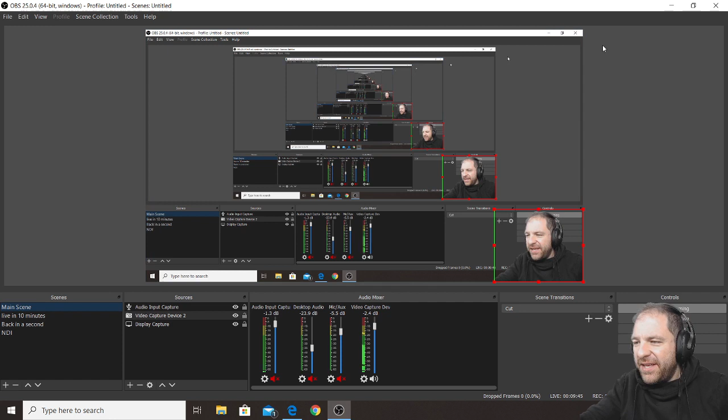Let me open the chat. Okay, and I have to go here. Let me open the right chat because I was watching the previous one. Here, live, fantastic. Ooh, it takes forever to find the videos. Oh, finally the chat, and I can close this.

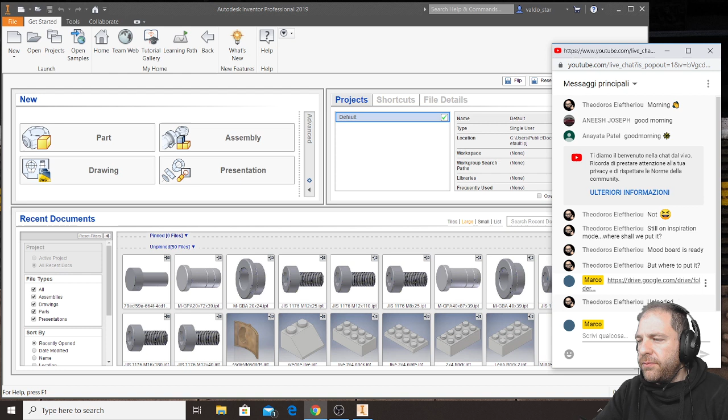So let's see what—great. So then I will have a look at this file, and then I will see if I can show you something that is more specific for the type of project that you would like to do. So I'll just wait for all of your classmates' mood boards as well, so that maybe next week we'll do something like how to do this, how to do that, by taking inspiration from your mood boards.

Today we have to see instead a lot of very complex things, and we need to start really going in depth in modeling complex shapes, because till now we know a lot of tools already, but we can do even more. We can make even more complex things, but not just for the pleasure of making complex things, but because something that happens very often in Inventor is that we may have an idea, but then we don't know how to translate our idea into an Inventor file, and so this sometimes becomes a limit, and a lot of students, a lot of professionals in general, tend to simplify their projects because they maybe don't know certain aspects of the software they are using.

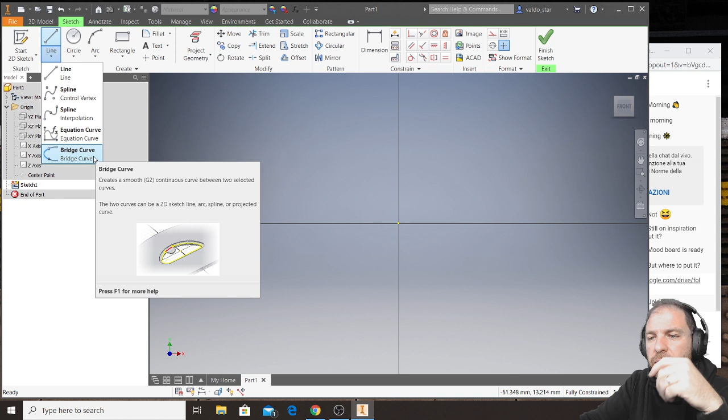First of all, whenever you have a tool and below it there is a triangular button, you need to know there are hidden tools inside that starting object. So below line you can find spline in two ways, and also bridge - an interesting tool that smooths two curves you've previously created. There's also one I'll never explain: equation curve. If you have a function like x plus y plus n equal to etc., you can create a curve from a given function.

So first of all, you need to know that we can just draw lines like this. But what's interesting is that there's a function really hidden somewhere - when we sketch, for example underneath rectangle, there are a lot of additional tools.

There are even 4 general ways to create a rectangle. The one we normally use is rectangle between 2 points - we click on a vertex and then click on the opposite vertex. But there's also rectangle between 3 points, meaning we make our first click, second click, and it can be wherever. So we're not even limited to making straight rectangles.

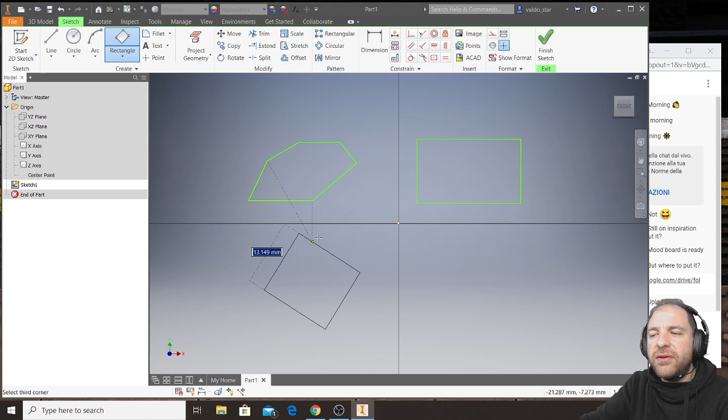If we make this line, for example, then the third point we click will start from that edge, and we'll make directly a rectangle that has a certain kind of rotation. This rotation at the very beginning looks like something you have to manage only after creating your rectangle, while it's not true.

Whenever we draw something - a line, a rectangle, or anything where we're free to choose the direction - we need to see this. Look, when I draw and move my mouse into my viewport, I can see these two numeric fields appearing, showing me x and y, because I'm in the xy plane - the xy position of my mouse.

Sorry, I forgot to open my software for the pen, but why do I want to show you this?

Simply because the axes we see when we draw are the main axes of our drawing plane. This is the x, this is the y, and according to the orientation of our viewport, this point here is the origin, the 0 point. This side is the positive side of our x-axis, this is the positive side of our y-axis, and these are the negative sides of our axes.

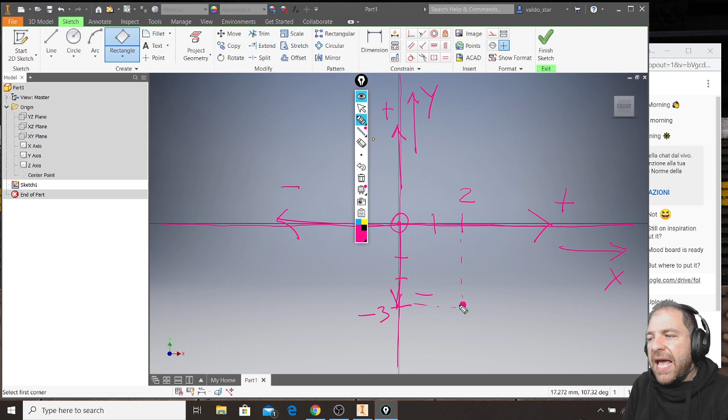So when we draw and see a certain number like +2, -3, it means that with our mouse - the first value is x, so +2, and -3 means we're here for the y. So we are in this position with our mouse. Those numbers can be read from the screen, but we can also type values directly inside those fields.

We just need to know how exactly this happens. So let me show you. That is very simple. That is this.

When I make a line, let's say I want to be sure, even if I can snap the origin, sometimes if I just move a little bit my mouse, I can see that by just making a very small movement, sometimes I'm not super precise.

But what I can do is, when I draw something and I see these white numeric fields appearing, I can immediately press a number. Okay, no, oops. So I can't immediately press the number, but I have to press Tab on the keyboard.

When I press Tab, one numeric field, instead of remaining white, becomes blue. And if the numeric field is blue, it means that I can edit it. So if I press Tab and the X becomes blue, now I can write, and I basically lock the fact that my line will start from a coordinate that has x equal to 0.

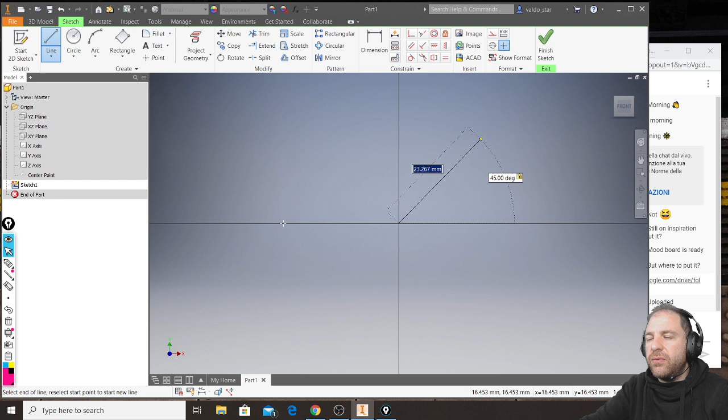Then, if I don't press anything, I can just press Tab again to go into the length. The angle has been locked. You can see that I can't go down here, because down here it won't be 45, it will be 225 degrees, this direction.

And now I have basically two choices. Or I even type my length. So let's say I will make it 30 millimeters and I press Enter.

Or I just set the angle, for example, this, and this is the trick. I press 45 and it is horizontal. And this is weird because you may think that this will be 180 degrees, but you need to see from where it starts counting. So this is 45 degrees from my previous segment, not in general from the XY coordinate.

So I can even just click the length and then I will make it vertical, and so on. But this is to show you that you can be extremely precise even from the beginning of your drawing. So I can type 10, then Tab, and say 135, Tab, and I will make this line here, and then I press Enter. And I can make very precise shapes from the beginning.

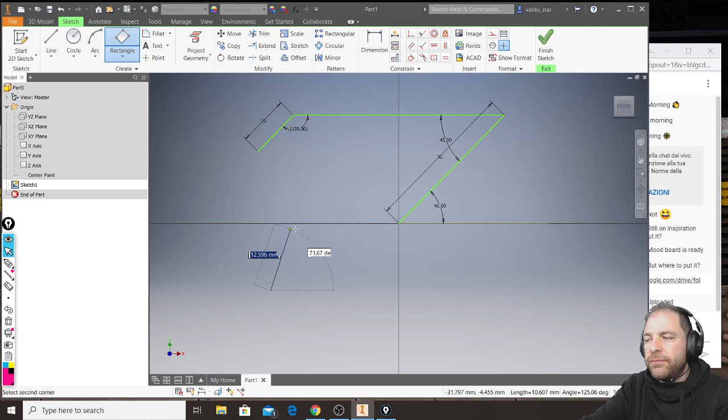And this is true whenever you have tools that allow you to manage numbers. So even when I make this kind of rectangle, you can see that the first point is in X and Y. So I will make it like here. But then, in order to set length and angle of my rectangle, Inventor asks me length and direction.

So for example, I will make length 20, Tab, I will make 45 for direction, Tab, and this is how my first side of the rectangle is going to be. Then I press Enter and I make my second element. Let's say I make it 20 again, so that I have made a perfect square that is also immediately 45 degrees angled.

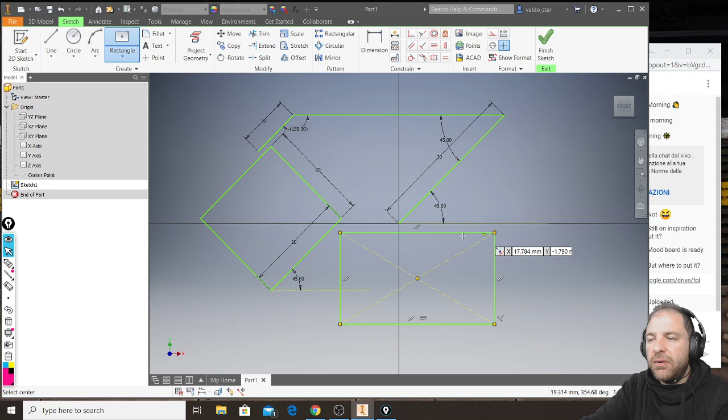But there are more tools in here. So there is rectangle from center, and point. There are also all of these beautiful tools called slot. They are extremely useful when you want to make joineries between pieces in your assembly.

This is because these shapes called slot can be made in a slightly different way. The final shape would be exactly the same. It's only that you need to choose if you want to draw them by taking 3 points, or by making a center point. There are different ways to design a slot.

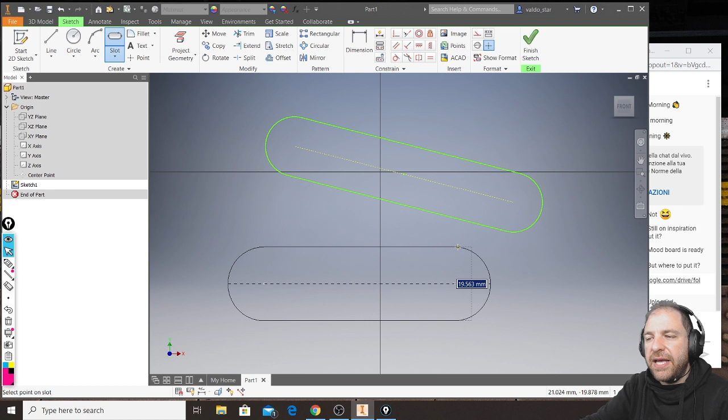Let me show them. The first one is very simple: you pick one point, you pick another point, and with your third click you basically choose the thickness of this shape. You can use another way called overall, where you pick from where this slot begins till where it ends, so instead of taking the center of those circles, you take the extreme points of this particular shape. Again, with your third click, you specify how thick the slot is going to be.

You can also have slot from the center. So you start and your first point would be the middle point, so it would be symmetrical from that point.

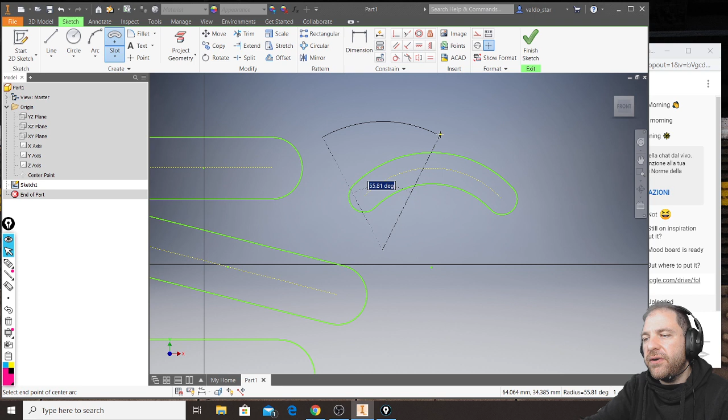And it can be curvy. So instead of making it linear, you can make it curvy by drawing an arc between 3 points, and then use your last click to give the thickness. Or you can make the same thing by starting from where the slot starts, but instead of using 3 points, you set the center of your arc, and then with the second and third click you create the path, and last you select the thickness.

Let's say you have this box. Just make it taller. Okay. And you should make it into an assembly, but I'm just showing you the feature. I make another box, and I want to make a box in this plane here.

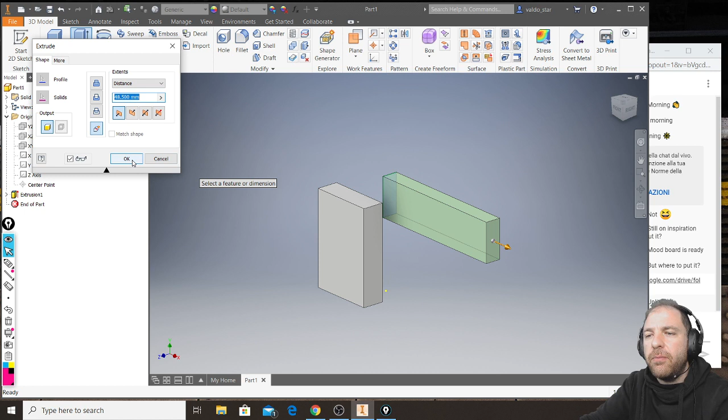But most important, I want to treat these two elements like two unrelated things, so I will use new solid so that they are not joined together, there is nothing in common. But just to show you this, in woodworking when you want to join this with this, and you want to make a 90 degree angle, beside the fact that there are a lot of ways to do it, one sure way is to create slots.

There is a tool called a router, which is basically like a drilling machine, but instead of having the drill bit go in along the axis of its shape, the drill bit cuts from its borders, from its edges. For example, you can easily make this: you can make a 2D sketch on this face, and you can make a slot in here.

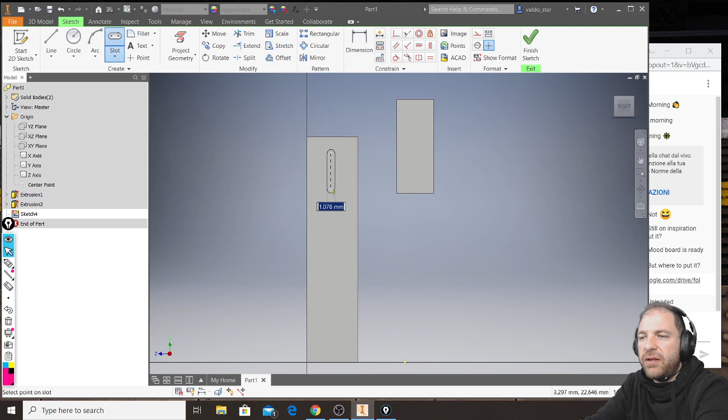I will just type dimensions to remember them, so I will type 5, enter, and I will make it 2, enter. I will make this as a negative extrusion, so I will click extrude, go in the opposite direction, and let's say 48 is too much, let's say 5. So I create this element here.

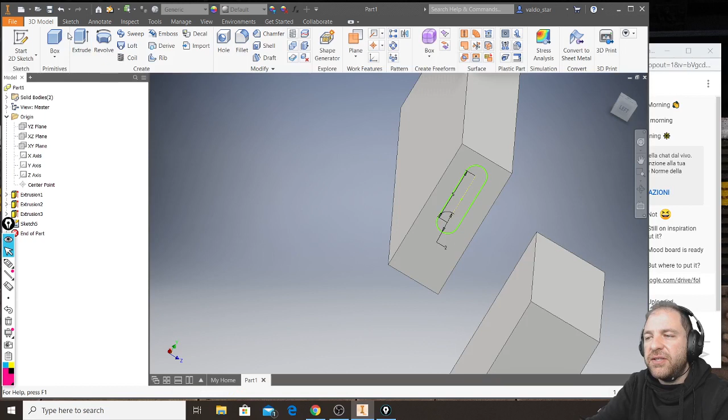In this other piece instead, I will create a sketch in here, and I will make the same exact slot dimensions, so it was 5 and it was 2, but in this case I will finish the sketch and make a common positive extrusion, boom. Now don't mind the fact that this is just one component, but if they were 2 separate components, they could be used in an assembly, because this male connection here will perfectly fit this female connection in here.

And I have 90 degree connected wooden parts. So this is why slot is very common, and also in the real world it is highly used.

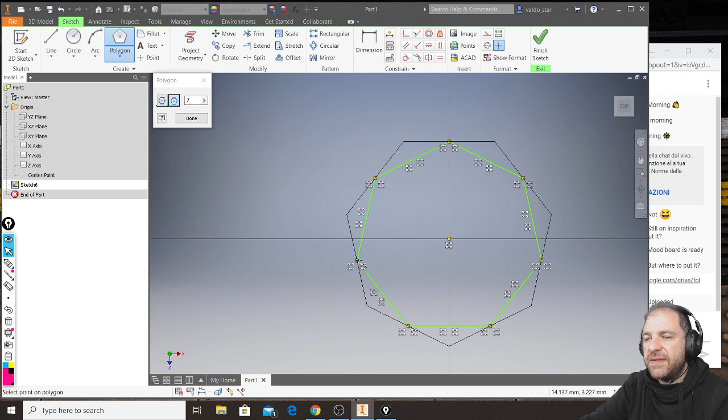And I can make it, as I said, inscribed or circumscribed. That would be like this. And I can easily make regular polygons without trying to draw them one line at a time, while I can easily use this tool that is called polygon.

Okay? Till here? Tell me something. Till this tool? Yes? No? Maybe? It looks like it is maybe.

Great! So look why I've done also this particular shape. When I make a shape like this, or a circle, I can just draw a point in general into my sketch, and the point is an object that has no dimensions, it's just a point that I can snap. I want to show you this because now I can make an arc, from here to here, and I can set my third point on this snap.

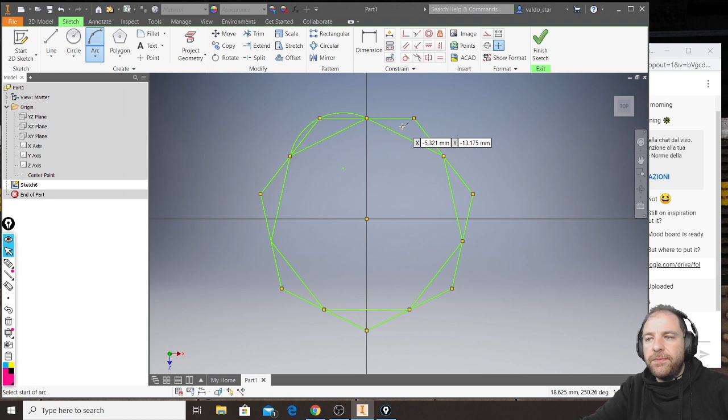And what I would like to do is repeat these arcs in all these other triangular parts. There are 1, 2, 3, 4, 5, 6, and with these they are 7, just because I was starting from a 7-sided polygon. But I have a life beyond Inventor, so I don't want to make another arc, another arc, another arc, and so on.

There is something called pattern here into my sketch. Take care, these are into the sketch tools. So I can find the circular pattern. What it means, circular pattern, in many other software is called an array. The circular one means that you can set a point, and starting from that point the software will create the number of duplicates that you want with a rotation in between them.

So what I have to do first is click circular pattern. By being sure that I see geometry highlighted, I select the shape that I want to duplicate, and then I click this button here to select the center of my rotation. Once I have selected these two things, the geometry and the center, nothing else remains than setting how many repetitions I want and how many degrees my repetitions need to cover.

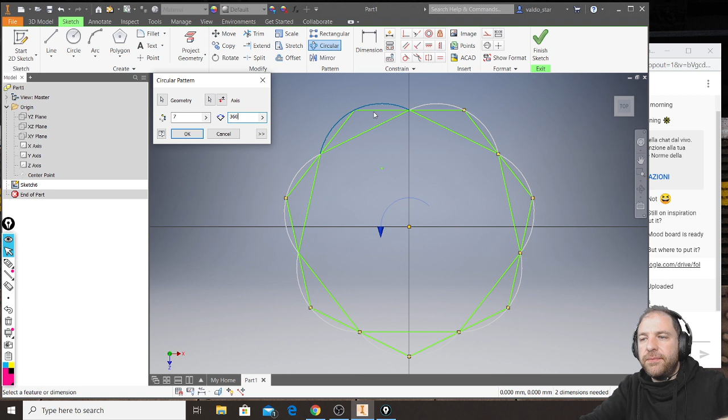I can use this button instead, that is called flip, if I want a clockwise or an anti-clockwise rotation. In my case, I really want 360, 7 objects. I click OK. And I have made this very complex shape in a matter of seconds.

If I want now, I could delete all these elements, but in order to avoid deleting, just to remember, if you don't want to extrude this one, what you can do is just select them and then click this option up here that is called construction. So they become thin, visible elements, and they won't be considered when you make your solid transformation. So I can click OK.

I have this kind of flower looking thing, and if I extrude... oops, no. Yes, like this. Why? I mean, it should be perfect. Sketch, extrude. No, I don't know why it doesn't like it. Because they are perfect. No, it's okay.

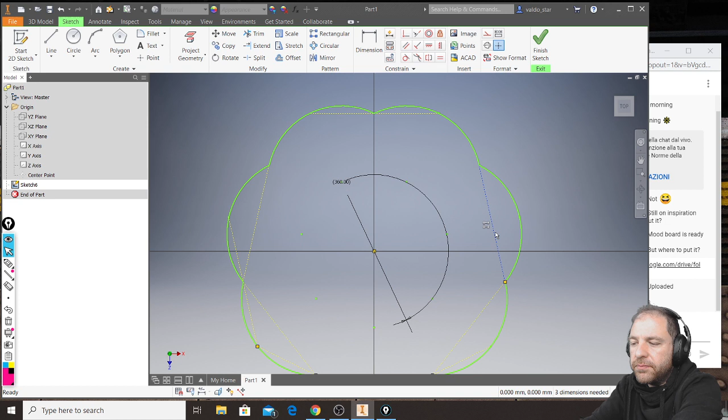So, you know what? Just delete all these construction things. Just delete them, because let me see if this was the issue—if Inventor doesn't like these construction lines.

Okay, let's see. Finish. Extrude. No, it doesn't like them, I don't know why honestly. It should be fine, I don't know if they are not touching for a very small part.

They shouldn't. Let's see if I chamfer them or fillet. Oh, chamfer. Anyway, this is... no.

Or Inventor is just stuck, probably. Probably yes, ah, that's easier. It was crashing, okay, sorry. Sorry, this is not my fault, but Inventor was stuck.

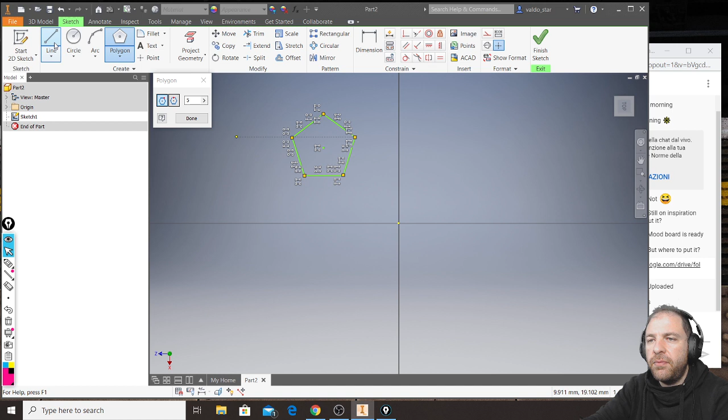So let me continue with pattern. This is a tool that you find into Sketch. Sometimes you already find the center because you are using a circle, but let's say you have these. Let's make a pentagon. And then I draw my pentagon just somewhere, and I want to make other pentagons all around this one.

So sometimes I don't already have a circular shape or a shape with a center, so when I have no additional geometries in Inventor, I can create a point to make my circular pattern. I will make a point by moving my mouse over here and going down, so that at least it will be aligned with my midpoint. The point isn't that visible, but it is just this dashed thing in here.

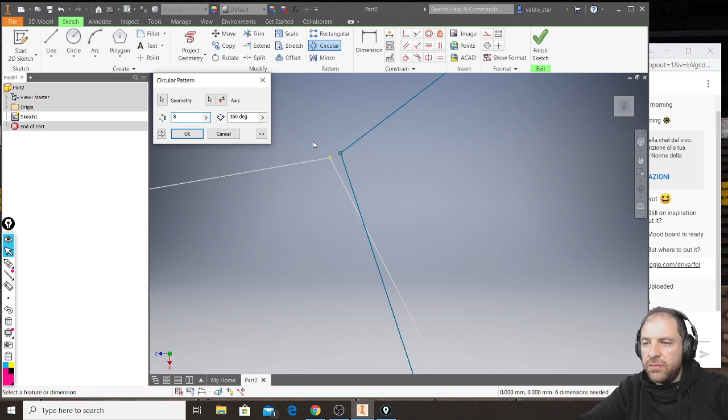So I can still use the circular pattern by simply selecting the geometry first. Then I have to click the center and I can pick my point. And I can create as many duplicates as I want. Let's say I want to try to make 8 of these.

So that they have those intersections. Click OK. I can see that these shapes are intersecting each other. So let's see if I can use trim to cut these parts. And it happens that, as you can see, you can't trim them.

This is weird because this is happening only because this is a circular pattern. So what happens is that it's basically something where if you modify one of these, it will keep modifying all of your objects.

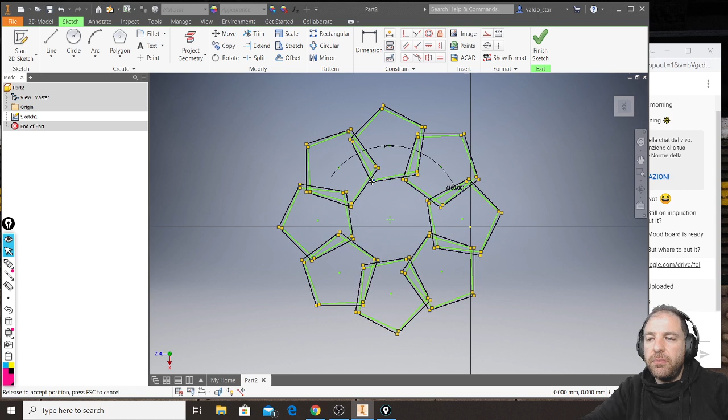And I forgot, so this is why the previous shape wasn't working. But if you want to now start from here and make a sketch by removing this possibility, because you now want to maybe trim all these lines and make a shape that you can extrude, you need to do this.

You finish your sketch, and one interesting but slightly complex thing you can do is make a new sketch on the same plane, and you can simply project all this geometry onto the new sketch, projecting only those that you really need.

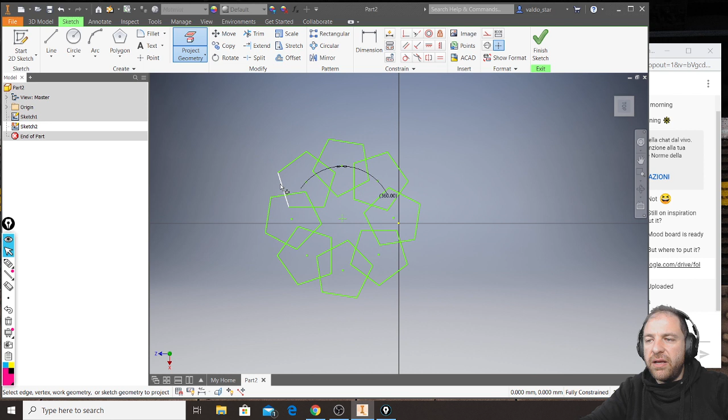Maybe I already did this. Okay, I finished the sketch. And if I hide my first one, by right clicking, deleting it, or just changing the visibility, this is the copy of projected edges that I have created in my second sketch.

I will edit this one and try if I can trim it. Again, you can do it, but if you select your projected edges and remove the constraint—select them, right click on the constraint and click delete—you will see what happens. So here, delete the constraint.

You will see that the thing... delete the constraint here... delete... oh, here, oh how lucky I am. Nothing, I mean just do it, try by yourself, and then yes, finally you will be able to trim them and make a shape that you can extrude.

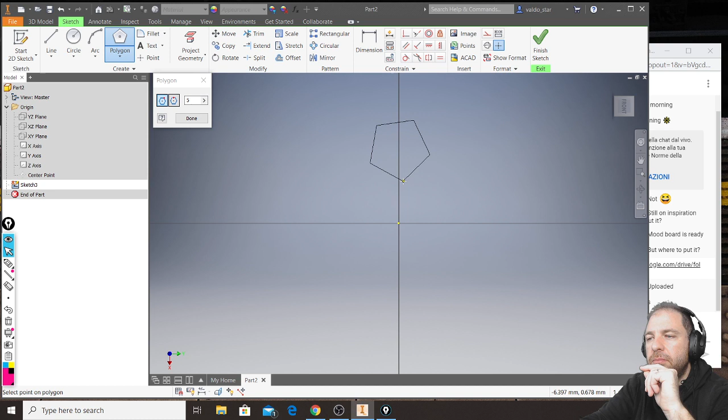Look, I will delete all these shapes and make something that is a lot easier as well as a lot more productive. I select the plane, make a sketch, make my single polygon. Let's say it was like this, and I do one interesting thing: I close the sketch, making this immediately become a three-dimensional tool. So I extrude it, whatever side I want, and I make it like that.

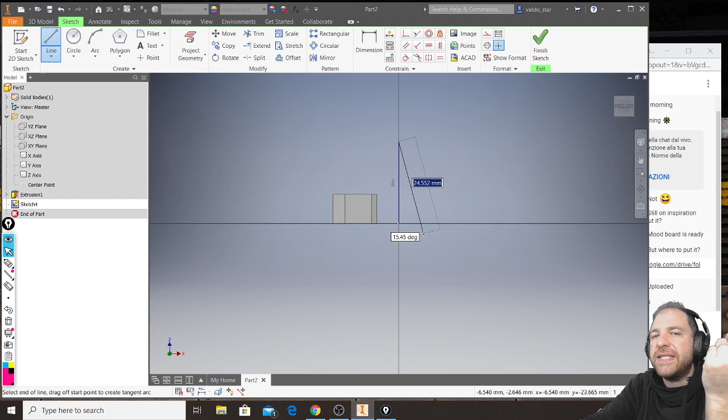Okay, ready for this? Now check this. On a perpendicular plane, not on the same plane where I have drawn my pentagon, I select another plane, and I draw one sketch that will be just one line. I'm making it vertical because I want this to become an axis for my circular pattern. So I make this vertical line here. I click finish.

Before doing anything else, let me show you another tool placed next to plane, called work axis. Work axis allows me to create axes from existing geometries. So I will click here and click on the line, and now I see this new element called work axis.

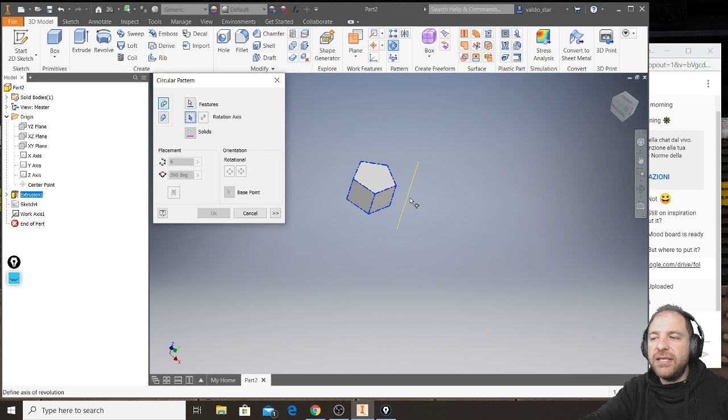Also, because axes like planes are invisible, I can even hide my line. Now check this: by being in the 3D model tab, I can see patterns here too, and specifically I'm showing you the circular pattern. What would be great is, instead of multiplying the sketch into one complete shape, I click circular pattern, click the feature - the entire solid I want to rotate - then click rotation axis and select the axis I created before.

So instead of creating one sketch that already has the shape I want, I make one little piece, and then I say I want 8 of these. I click OK, and boom, I have the shape I wanted to create.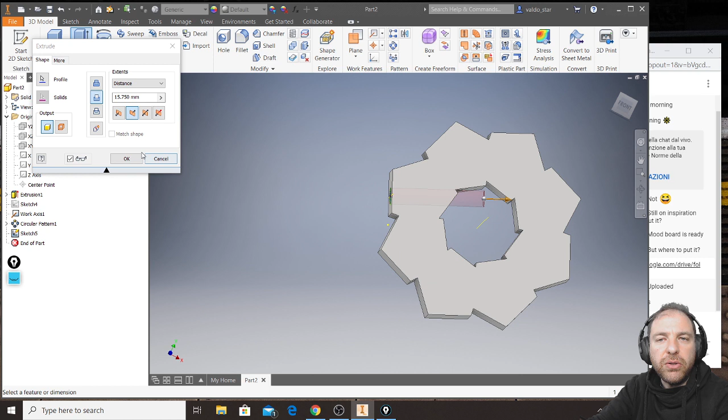What is phenomenal is that my axis remains there. So if I want to modify something, watch this: I select this face of my octagon and extrude it, creating this shape. I extrude it with a certain value, so it goes till here, and this becomes basically a hole in my simple 3D object.

If I change my mind and say, now I have one hole on this side, but it would be great to have the same hole in all other objects - where's the problem? I make another circular pattern, select the feature, which is basically an empty cylinder, select the axis - having that axis always there is perfect because they share the exact same center. My holes were 8, so I click 8, click OK, boom, and I have the same feature repeated all over my objects.

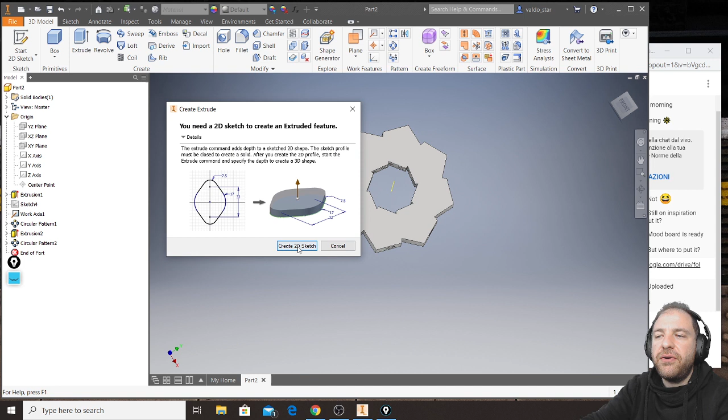And I can keep doing this. Let's say I select this plane, make another extrusion, create a 2D sketch, and create something here - it just has to be a closed shape. Perfect. I extrude this other shape from the opposite side so that it will cut my final result.

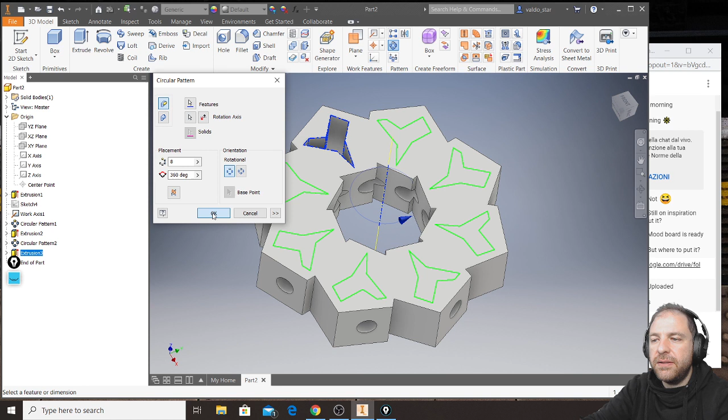Because I'm not that happy, I click circular pattern, select this feature, select this axis, and click 8 objects, click OK, boom, and I have the same cut repeated all along my objects.

Okay, are we good up to here? Let me know. Yes? No? Maybe? Perfect.

So if we get this, what we can do now - this isn't really important, but for example I could select this plane, and you can see that working with precision starts by being extremely important. You can see that my axis actually is also contained in one of my vertical planes. Why do I want to do this? Simply because it's not really important, but it's interesting.

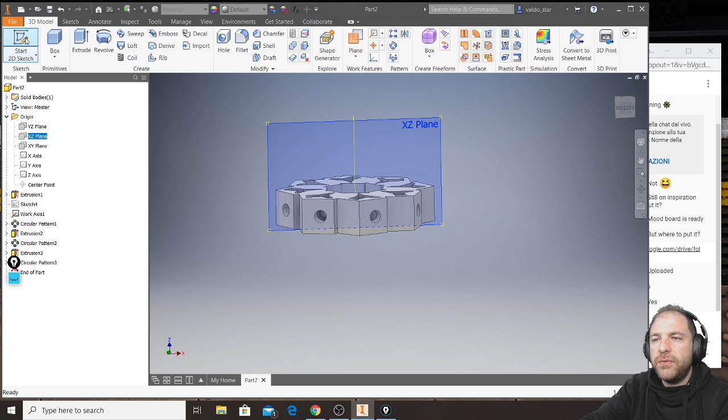I will make a sketch in this plane. For example, I'll go to View and change the visual style to wireframe so I can see in transparency. And in my sketch I will draw something like this. Why not? I click OK.

Then I make a line to close this pattern here, and I finish the sketch. I can go back to my view, visual style, shaded with edge, just to show you that having that axis is something crucial.

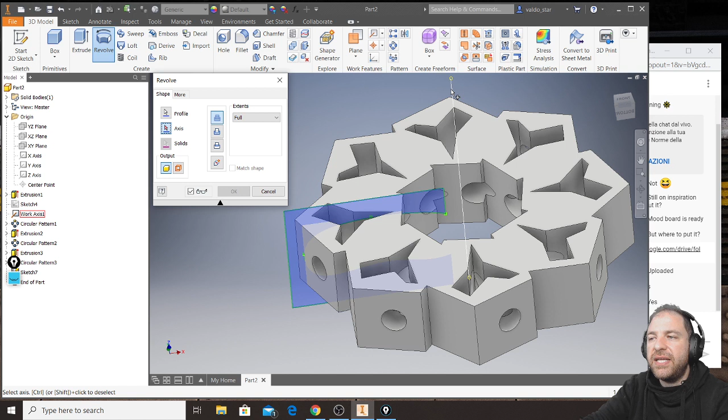Because I can also use revolve, and when I select the axis I can still use this axis here, so that I make a rotation of my shape around the axis. For sure I won't do a join because it will cover that masterpiece I've made.

I will use that particular shape to cut what I have created before. So I click cut, click OK, and after all these steps I was able to create this very complex looking shape that is rounded on top and on the bottom. It has 8 repetitions.

I can keep adding features and features. For example, now I could fillet it, probably. Let's select a loop - let's see if I can fillet it, this loop. Maybe 0.5.

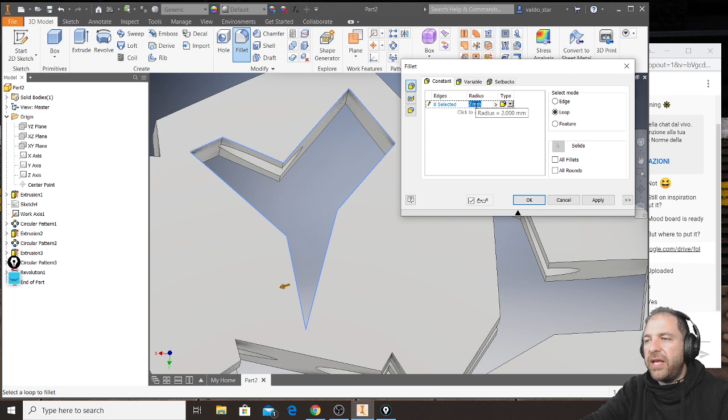Okay, so let's say I want to fillet these. I want to fillet that. I want to fillet this one. So I'm making a lot of fillet combinations. And again, it takes forever if I have to repeat these fillet options for all my available edges.

No, I selected the wrong one. 0.15. No, I have to select just that one, I shouldn't select that.

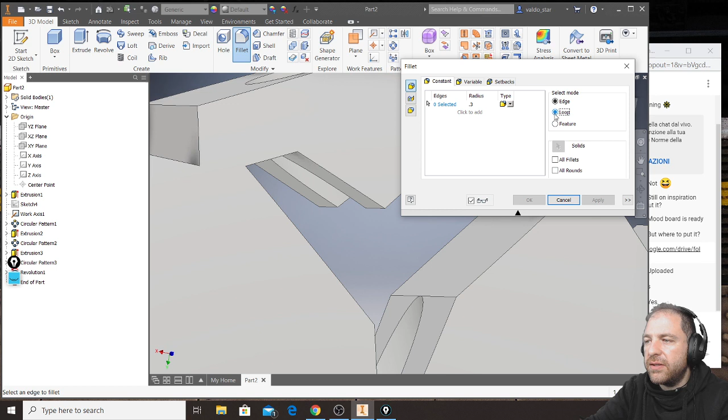Okay, so quickly, I want to show you that in general, pattern is something that duplicates features. But what you need to realize is that features in Inventor are not only shapes. If I'm using fillet, look, I'm using fillet in one part of my shape.

Boom! I say, take care, you can see that now if I keep 6, the result will be wrong. There has to always be a meaning. I click 8, I click OK.

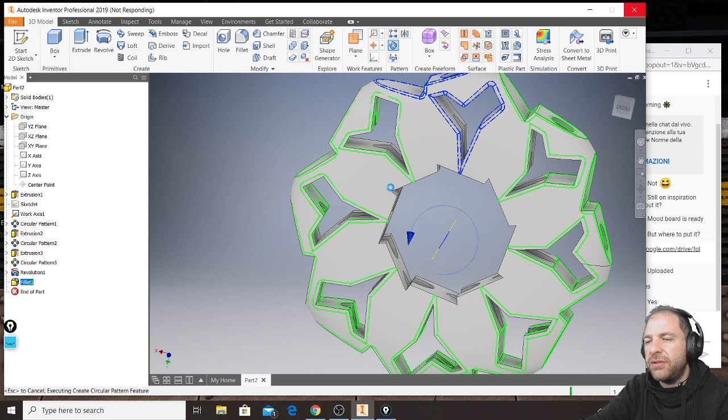If Inventor doesn't crash... I knew it. But I am, oh, phew, but I have also repeated fillet all over those 8 additional parts of my shape. Okay?

And this is why it is important to understand that there are patterns in Inventor, but it is a lot better to use them into the 3D model rather than using those that you find into the sketch.

There is also rectangular pattern. So let me delete. I'm so sad to delete it because it was looking great, but it's okay. So let me delete everything. And what is a rectangular pattern?

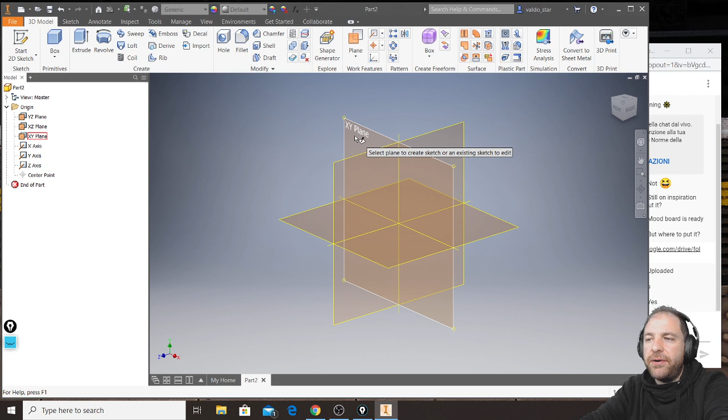It's basically this. Look, let's say I make a box, nothing fancy. And in this box, I want a lot of holes. But not holes that I can just make with hole, because maybe they have a certain shape.

So I create a sketch. Again, I make a polygon, this time a hexagon, but not for any reason, just to try different things. And I make this hexagon shape in here. I click finish, and I will extrude this one. That can be positive, can be negative, it doesn't really matter.

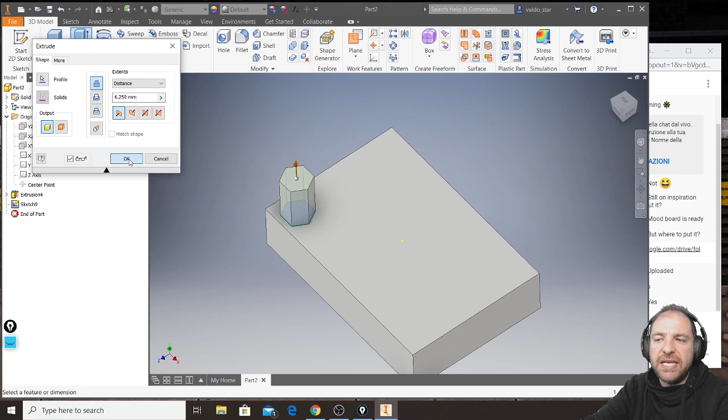But if I want more of these, what I will do is I select rectangular pattern. I click feature so that I can select the feature that I want to multiply. And then I need to pick direction 1 and 2. So I've made this simple box first, simply because in this way I can pick this edge as direction 1. I can pick this edge as direction 2.

And don't worry if it is going in the direction that you were not expecting, because when you pick the direction, first of all, this button is called flip, so you can always flip the orientation according to the direction. So I will do this in this case. But you can also use your direction to be used as a symmetry axis, so you can have your duplicates go in both directions, but in this case it's not useful at all.

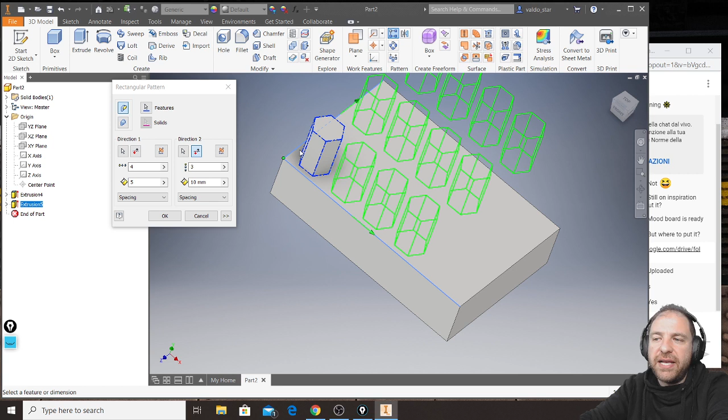So I can, for example, decrease the distance that is in between each of my objects. Let's say I will type 5 in here. But I can also, and you can see this, if I make 5 now, I can see that yes, this starts at a certain point and it finishes here.

But I don't really know how long this thing was. So another way to use the rectangular pattern is instead of spacing, I specify distance, and I have to pick this one. And I specify the distance between the first and the last one. So let's say I will make it, I should read how long it was. I think it was about 24.

No, it was 22. And inside this 22, I can have as many duplicates that I want. So instead of changing the spacing in between, I know the distance between the first and the last, and Inventor will equally space all additional duplicates. Let's say 5.

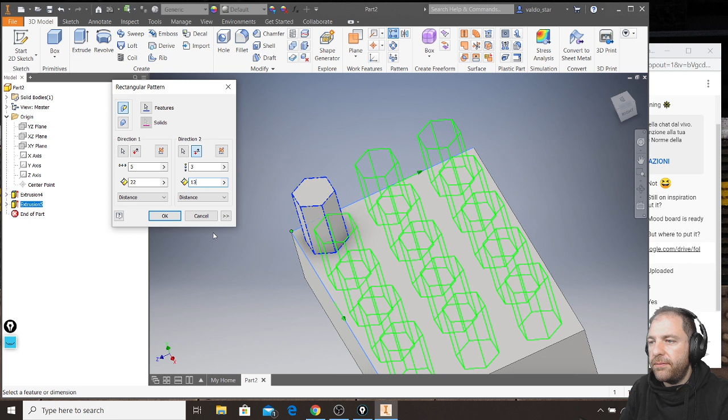Same thing can be done in the opposite direction. So I can have the spacing here, and I can always choose just the space in between each of them, or even here use distance. It was 13, exactly. And then inside these I can have as many duplicates that I need.

I click OK, and I have all my duplicates created. I have this extrusion and this extrusion. What is great is that if I change this extrusion and click OK, my pattern is immediately updated. As well as if I change my mind and say, instead of going up, I want them to go down and cut, I update the extrusion and the final result updates too.

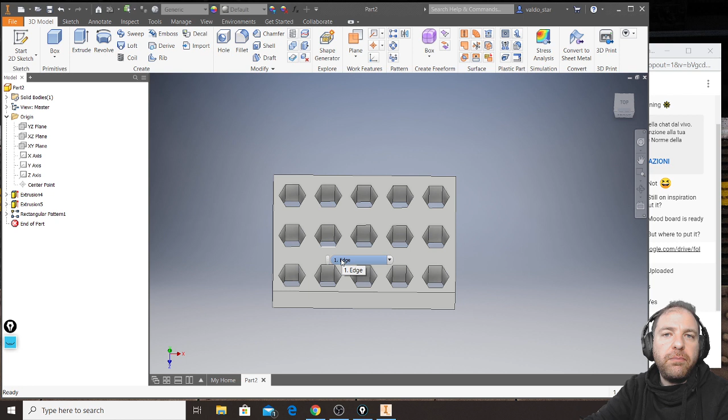What is important is that the direction I have selected was perpendicular, but you are not limited to being perpendicular. So if instead of a box I had a shape with lines that are not 90 degrees angled, it will work the same.

Okay? Till here? About rectangular pattern? Yes? No? Maybe? Because now I have to show you something that is unbelievable. Perfect, I love also the depth of your answers. No, like, is it? Yes. Just yes. Okay, and it's okay.

Let's see something more that I want to show you in the Loft tool, because we have seen Loft and I showed you that Loft is a tool that allows you to combine multiple shapes together. But what is interesting is that you can have much more control in Loft by creating guidelines. What does it mean? See this.

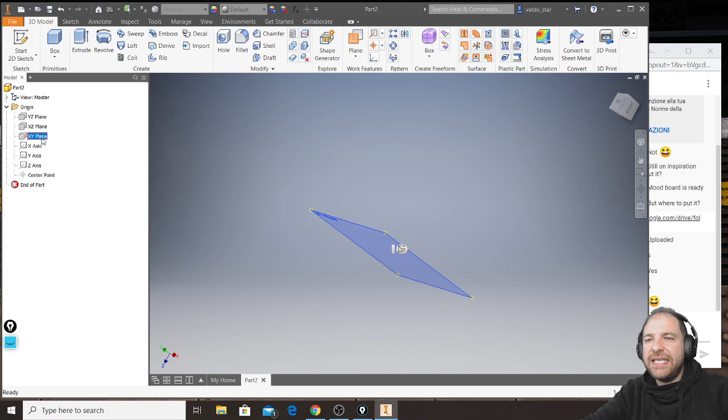Let's see this. First of all, I will make a very simple one by making two planes. So I will make one shape on a horizontal plane, another shape on another horizontal plane, just offset from the starting one, and I will show you two different results. First, let me create this offset here. So I have these two planes. Let's say 10 millimeters as the offset.

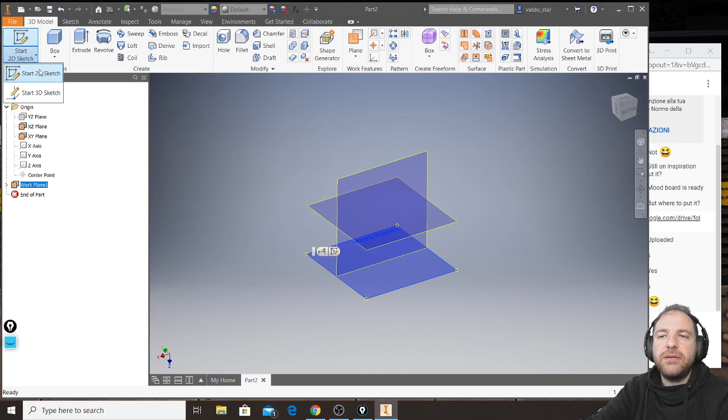So it was this one. I can also make it visible just to show you. I have these two planes, and I want to make this plane visible too, just to let you understand what I'm going to do. Look, in this lower plane, I will start by making a simple sketch.

And to make it even easier, I will keep my line open, so even if I make a surface it doesn't matter, but we will avoid having problems with the sketch not working. I will make this shape here. Then I will select my upper parallel plane and make another sketch, starting also from the axis, like this. And I finish the sketch. So I have nothing really special here.

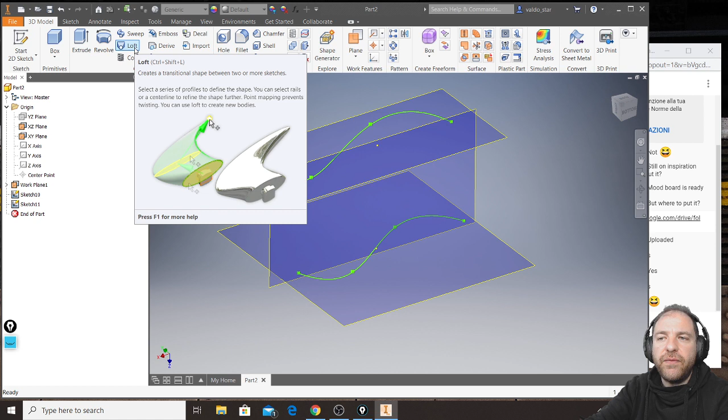I just have two sketches in two planes, and I know I can use Loft by clicking to add. I will make a surface, just because it's faster, and click this and that. But you can clearly see that because my shapes are created in two parallel planes, the connection between them will be basically a straight connection. So if I click OK and hide these planes for a second, what I obtain will just be a perpendicular surface that is wavy, connecting the top and bottom open lines.

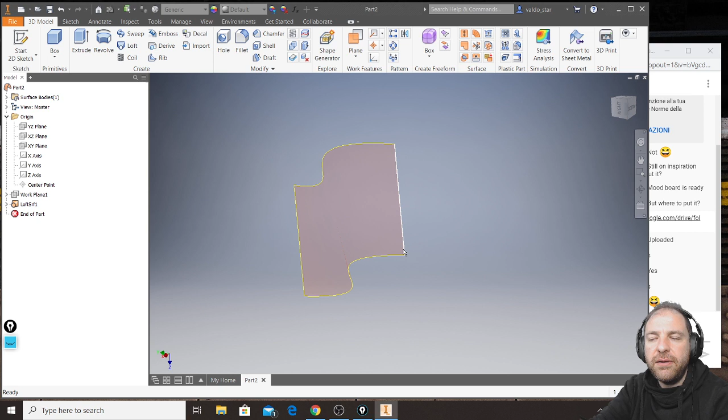Okay, so nothing really exciting. So what can we do more? I delete these - I don't want to delete my sketches, just the feature, because I will reuse those sketches. I just want to use this plane here, that is a perpendicular plane to my shapes.

I will create a sketch here, and it can be whatever, but for example, I will create this spline here.

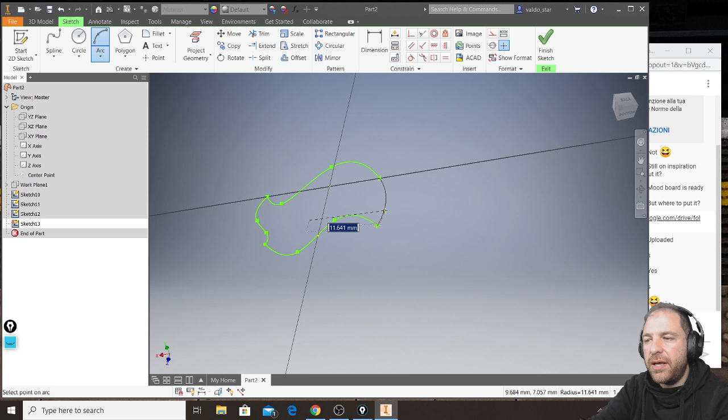I will create another sketch on the same vertical plane, but it has to be different—can be straight or an arc, for example. If I can't snap it directly, I will project this geometry and that geometry so I simply create two points, and then I will snap my arc here, and finish the sketch. I hope that this was precise—I don't know, but let's see.

So what I will do now is use loft again, and I will do something unbelievable: I will click to add, and add this and this again as sketches. You can see the result looks exactly like before—there are just two sections, and they are giving me this straight result.

What I will do instead is add rails. I will click rail here and choose this one—and it's not precise, I knew it. I will use this one as well, but unfortunately, no. It's so annoying when it happens. Let me quickly check if that is fine. I click rail and select this one, and this works—sorry, that wasn't snapping. So I just do it again quickly.

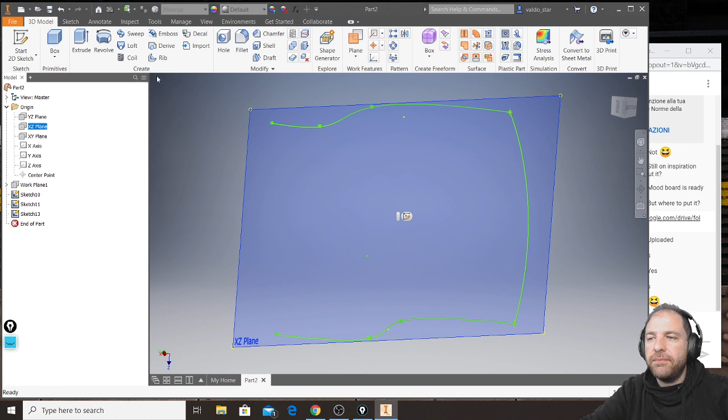I make a sketch, but I project this point and this point so that I can snap my spline. Exactly, okay.

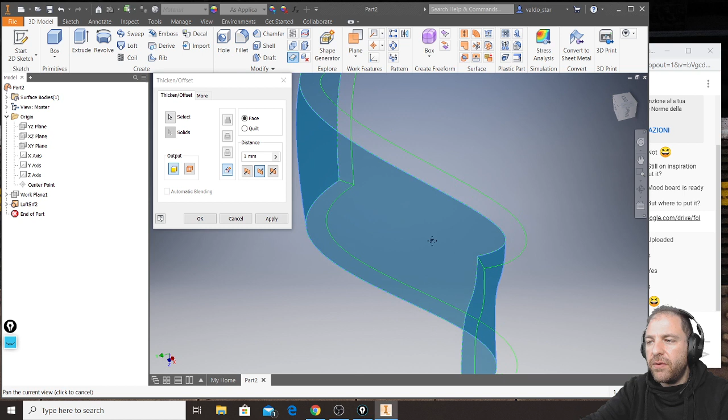So again, I select these two profiles, and I click and add this rail, and on the other side I add this rail too. So basically I have 4 lines creating a more complex and organic shape. I click OK, and I get this great looking surface that I can later turn into a solid by selecting it and using thicken—maybe 1 millimeter, but from the other side. Even if it's a little too thick, I click OK, and I have created this very complex solid using 4 curves for the loft.

Technically, if I am precise, I can have as many profile curves as rail curves that I want. I just need to be a little precise in snapping points, because if not, as you have seen, this feature won't properly work.

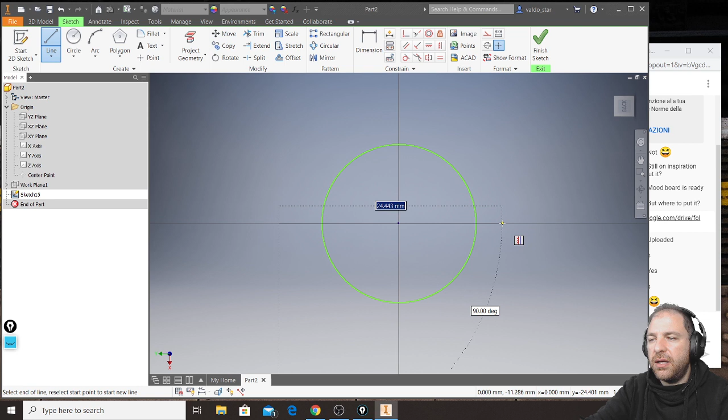So let me show you another, very visible result—see this. I have this plane, and I make a sketch: a simple circle from the center, and then a line so I can trim it. Now I want to have the same exact circle on my parallel plane. So I start a new sketch on this other plane, and I don't want to redraw it, so I click Project Geometry and finish the sketch. Now I have these two beautiful arcs on both of my parallel planes.

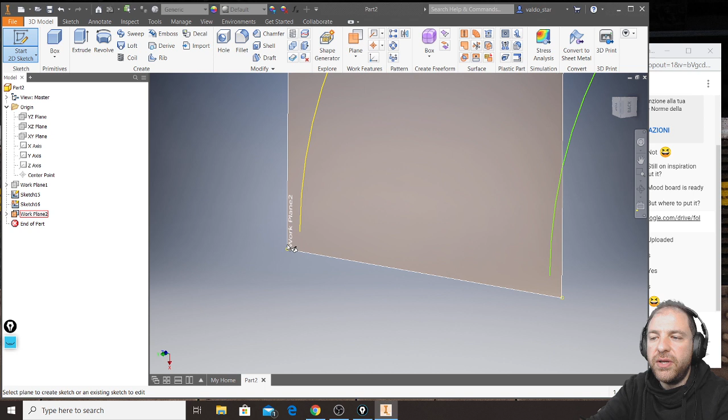If I want to make a rail, I need to be sure I work on a plane that intersects my rails on my shapes. So, for example, I will make a plane parallel to this one, but passing through a point—I'll pick this vertex. This way, this additional plane will for sure touch this point and this point, so I can make another rail on this new working plane. I want to make another arc, but snap it to these two vertices, so I project this point and this point so I can use them, and I make another arc like this. Now I just hide this plane.

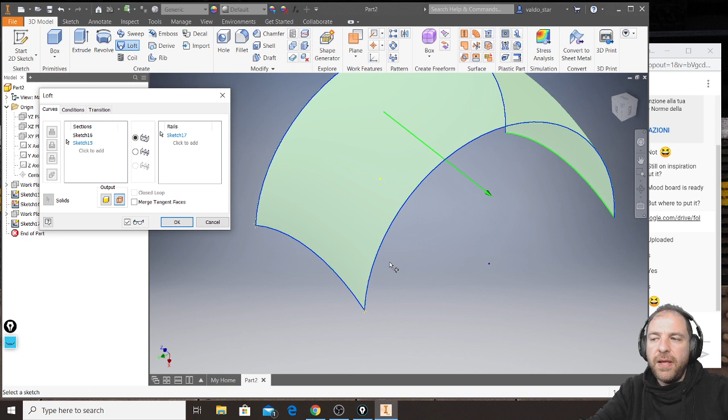So look what you have: two sections, one rail. You use loft, add sections, click this and that. They are one the projection of the other, so their connection will be perfectly straight. But I've created this unbelievable shape, so I can use this as a rail. This way, instead of having just a cylindrical shape, my circles, my arcs, are connecting each other while also having this curvy path.

I will then, just to make them more visible, turn them into a solid using thicken. Click OK, and this is the result I have. I can also hide the surface. Now I have this solid that is curvy all over its surface, plus it is curvy here. Okay? Yes? No? Probably?

Now I want to show you a feature that takes a while to be mastered, but thank you for the feedback - it is unbelievable. It's called 3D sketch. Let me show you this additional feature, because this is something very complex and it really depends on case to case, but it is too cool, so I need to show you.

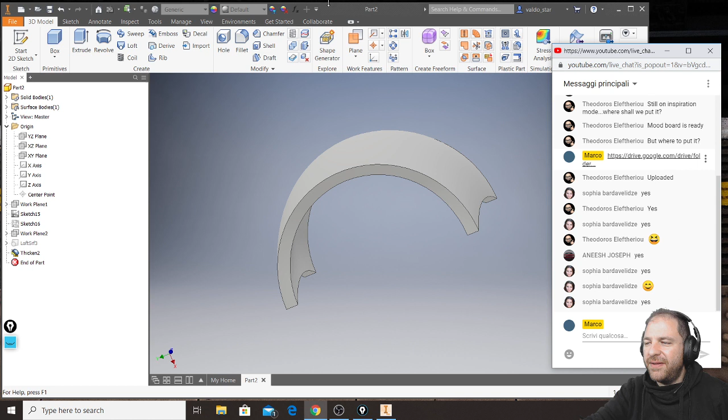Let's see this. Now I have this phenomenal shape, and I want to use - do you remember we have seen sweep, for example, last week? It is the possibility that we have to create a path, to add a section, and the section will follow the path. But what I want to do now is something a lot more complex than just creating a path and making a shape, because I want to make a path that will stay all along this object here.

I need to create a path that is not planar, because my shape is not planar anymore. It is curvy like this. So I can't just select it and make a sketch, because this is not a plane. But what I can do instead is this - look.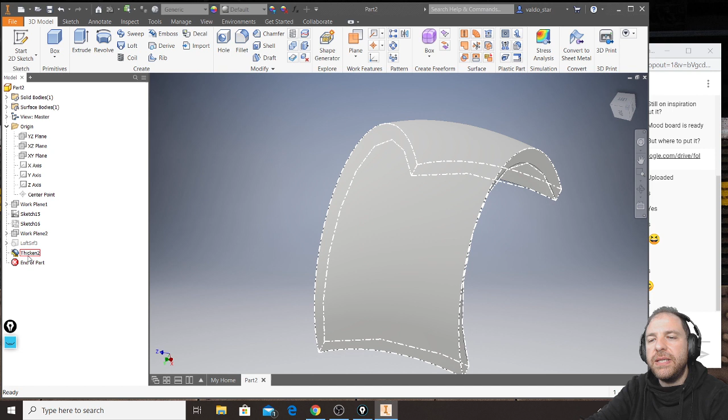I will show this surface again, and instead what I can do here is make another surface. So I will make something like a spline - it's not mandatory to make a spline, I do it just because it looks more complex. But I will extrude this spline, and it has to be a surface. So I extrude this one.

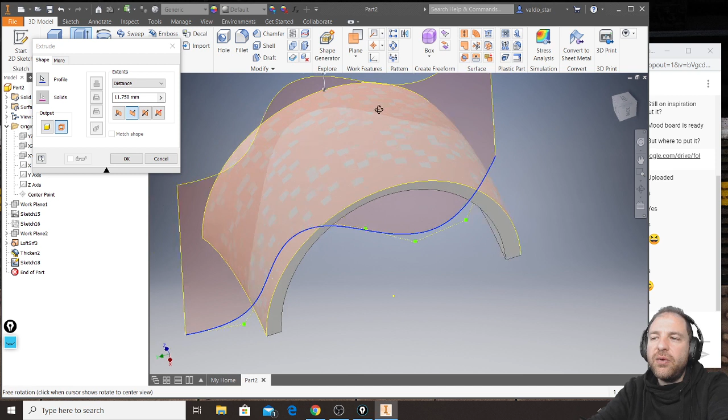And I will see that this surface and the one I've used to create my loft are intersecting each other. So I will click OK. And now I have that surface over my solid - you can see it in orange - plus this second surface.

So check this, because instead of clicking 2D sketch directly, what I will do is click 'Start a 3D sketch,' which has just a few tools, but what's interesting is that I can create a 3D sketch by using these tools here that are extremely powerful. So I will click intersection curve.

So I select geometry 1 and then I select geometry 2, that is my second surface - this one. I click OK. Boom! And Inventor will create this yellow shape that is a sketch.

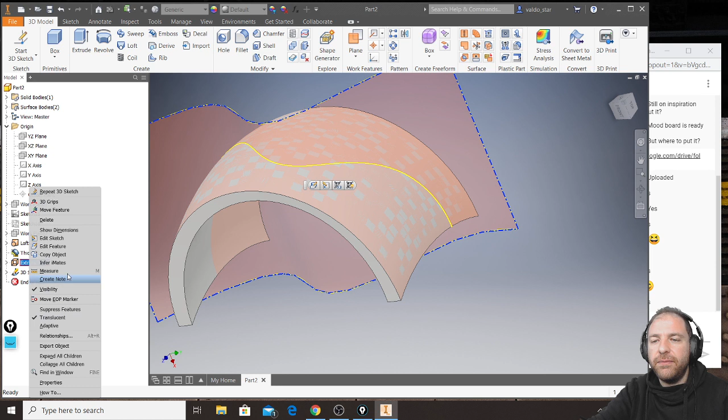So it is something that can be used in multiple ways. One of these is I can use it for sweep. So I finish the sketch, and just to remove unwanted things that I can't delete, I will hide them - I remove the visibility from these two surfaces, just to show you what I have created as a 3D sketch.

So if I want to make a sweep, now I just make a circle - should be fine if I make it here. Let's see, so I make a circle by using a 2D sketch. Let's say I make a circle here. Should be fine, let's see. I don't know why it took this line, so let me delete it. Okay, so I use sweep, and the software finds immediately the profile.

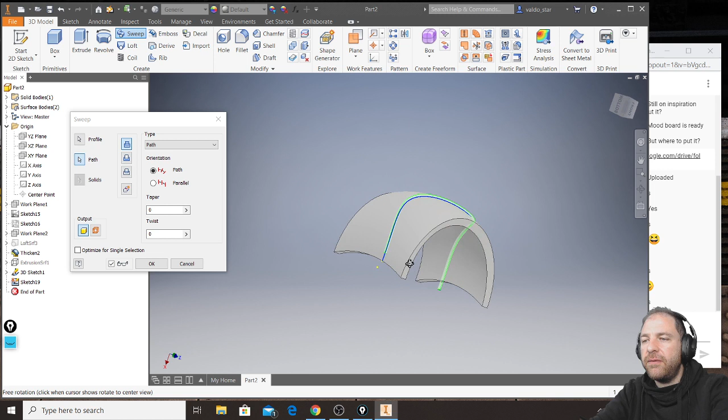I have to click the path - that would be this one - and boom, you will see that my circle will follow that phenomenal path that I have created. If I click OK, this will be a union, so I will add this as an element. But if I double click and make it a cut, this will remove that beautiful shape from my surface.

And this is one way to start using 3D sketches. So you can create 3D sketches that come from intersections of surfaces, or from faces in general.

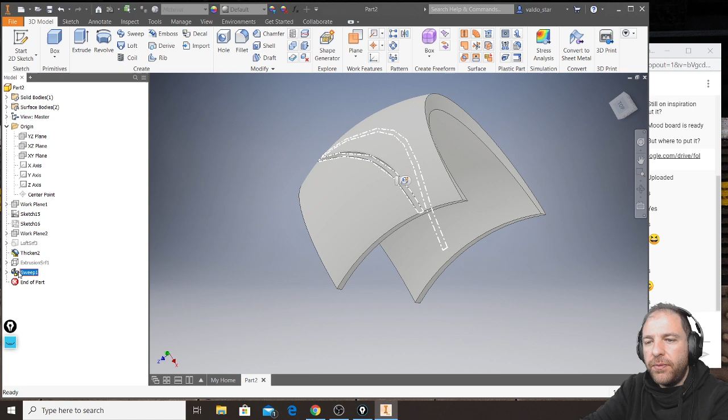But let's delete this one. No! No, this is a disaster. No. Inventor that crashes. No. When I save this on YouTube, I have to edit this part - I have to cut it to avoid people seeing that even Inventor on Marco's laptop can crash. No, what a big failure.

Anyway, let's continue with 3D sketch, because see this - another thing that you can do with 3D sketch, so I have that beautiful thing.

Let me do it. Let me see this.

Another way instead of creating 3D sketches is you can use 2D sketches and project them on your created solid. I'm using revolution solids just because they have no flat faces, which would make the 3D sketch completely unuseful, because if you have flat faces you can just click on them and draw 2D sketches.

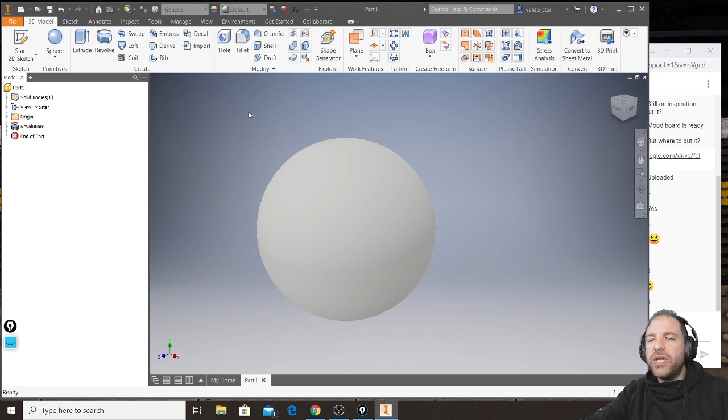But see this. What you can do is, for example, draw something into a plane that is offset from this one, and I will draw into this sketch a circle. Wait a second, because...

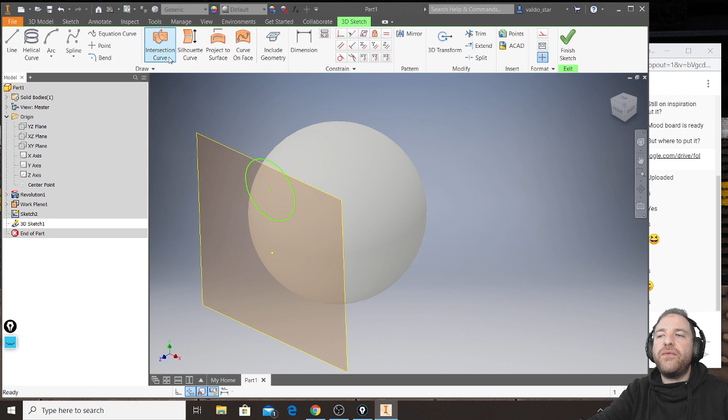Okay, see this. I can, for example, draw this sketch. There is a 2D sketch, but ready for this? Look, I can go to 3D sketch, and another way to use 3D sketch is, instead of using only intersection curve, I can use project to surface. So I click project to surface.

I have to click faces, which in this case is my sphere. I have to choose which curves I want to project onto my sphere, and I will select the circle. You can see it will perfectly find the perpendicular orientation, which is the normal direction of my plane. Ready for this? I click apply.

My circle will be projected onto this spherical face, and this is the result. What is great about using this feature is that in this way, the shape you have created and the original 2D sketch are always linked together.

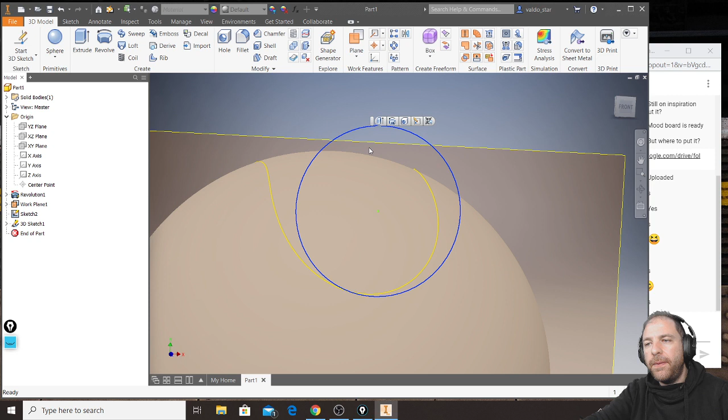So if you select your original 2D sketch and, for example, change the radius of this circle, make it 20, and maybe move it from here to there, your projected sketch keeps adjusting its shape according to your original 2D sketch.

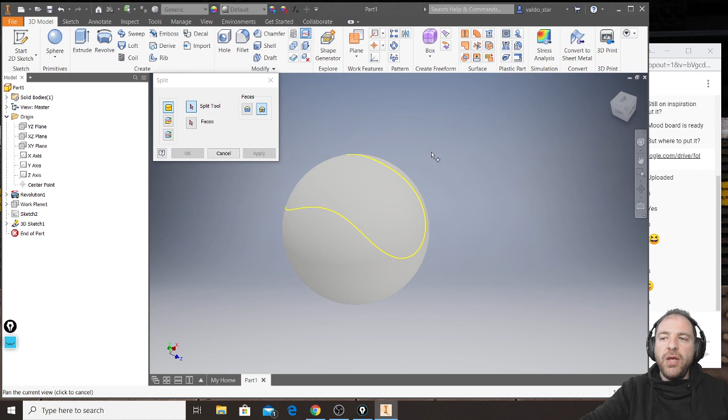And you can use this shape again as you want. I've made a closed sketch this time simply because, for example, you can use this in order to split your sphere. So you click split, select the split tool, your 3D sketch, and faces, this face, and click apply.

At the very beginning, it looks like you haven't done anything in particular, but by using split face, now your sphere has this face working in a certain way and this face being completely independent.

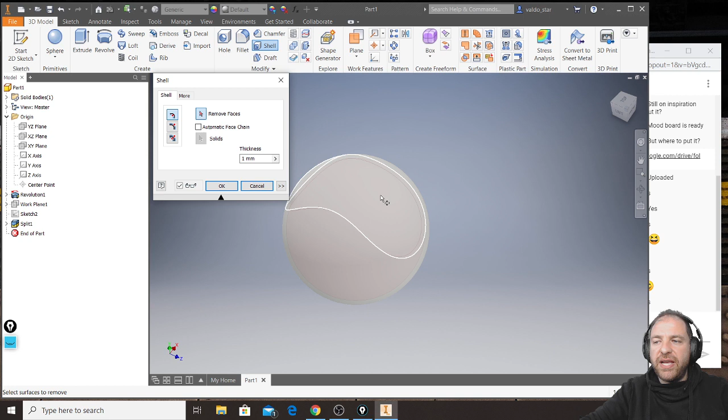So, do you remember we have seen shell? I can select shell, click remove face, and shell these. I should be able to remove it. Exactly, I should uncheck face chain. Wait a second. Shell. Exactly, click before remove automatic face chain because I want to remove this specific face.

Now that I have split, I set the thickness of my sphere. I will click OK. Poof! And I have this as a final result.

Or I can use thicken, so I can do the same thing. Look, I will just make another sketch on this plane. Also, I'm making circles just because it's faster, but I make another 3D sketch by projecting this curve onto this face, and I click apply.

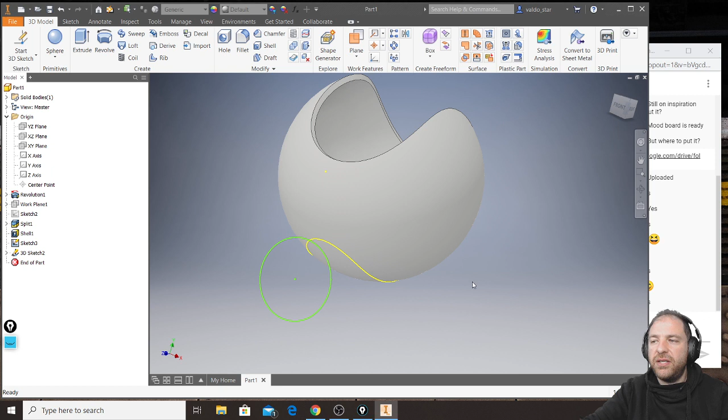Finish the sketch. So now I can use this other shape to split. I click split. Split tool is this. Split face. Face is that. Apply. And now I can close it. This is another face.

Instead of using shell, I can use thicken instead. So I click thicken. Even here, I will choose remove automatic so that I can select only this face. In this way, I will extrude only that split face that I created before.

And I can start working with 3D sketch to make very complex elements. 3D sketch is not finished. There are a lot more things I want to explain, but I think for today it can be enough.